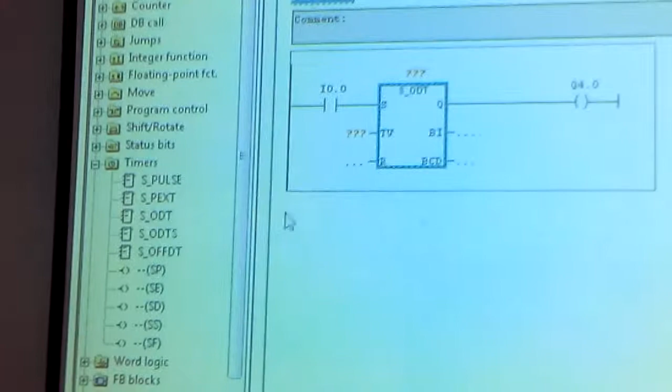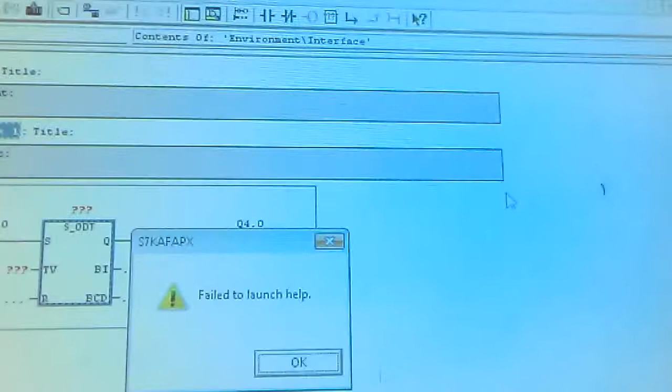Just see here. Select the network and double click here. This is the timer ODT, but I wanted to say this is the on delay timer. So just select it first and press F1. This is not appearing because in Windows 7 it doesn't appear. If this were Windows XP, the help page would have appeared here. That page is not able to open here because of that. But this is the on delay timer.

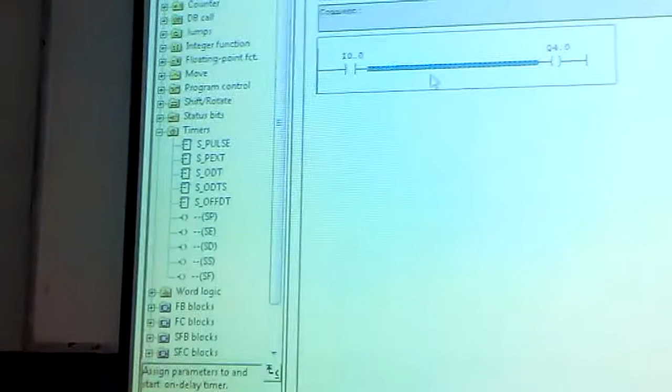So I am deleting it and want to show you the pulse timer. Why? Because we know the property of the on delay timer. That is why I am not using it. On, off, and retentive, we know the property. So pulse extended timer, what is the property of pulse? First of all, I want to fulfill the criteria of a timer. After that, we'll let you know.

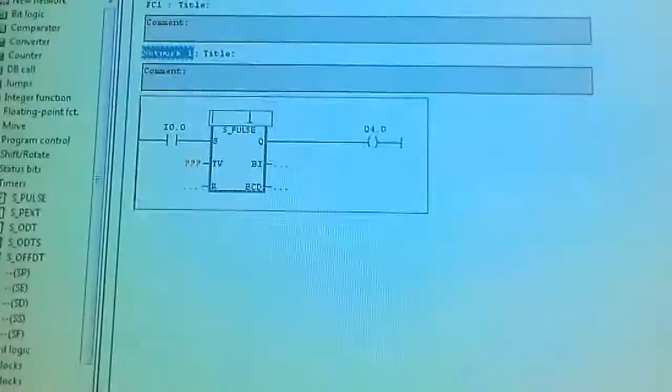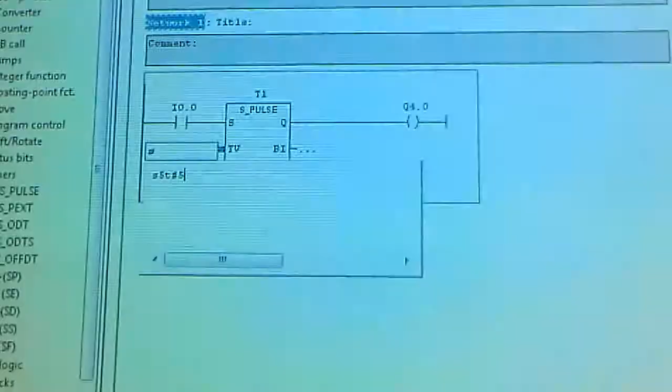Here is the T1. I am giving an address T1, and here is the TV. I am giving 5, whatever time you prefer, like 2, 3, 4 in seconds. So 5, and then I am writing S, 5 seconds, and again press enter. This value has been accepted. See, this is the code for the S7-300 timer. Using this, you can set the preset value of the timer. Otherwise, you cannot. Then here is the reset terminal.

At the reset terminal, I am giving an address like I 0.2, even I 0.1. See, it's not necessary to give an address on reset. It is up to you. If you want to give it, then give it, otherwise leave it. Why? Because the pulse timer has no need to reset. The moment you withdraw electricity, it goes off.

But so far as the retentive timer is concerned, it has the property that once it achieves its preset value, it becomes excited and behaves as a set. So unless that timer is reset, it will not work the way it was working earlier. So to work with a retentive timer, we need to reset. But on, off, pulse, pulse extended, it's not necessary to reset them. But the port has been given.

If you wanted to reset it during the achieving preset time, you can provide power supply on reset, and that will return to 0 for this purpose, right? And this is the BI, just equal to accumulator. So whatever time you have given to timer, the moment you start giving power supply to timer, it starts achieving preset value, and that value will be shown here.

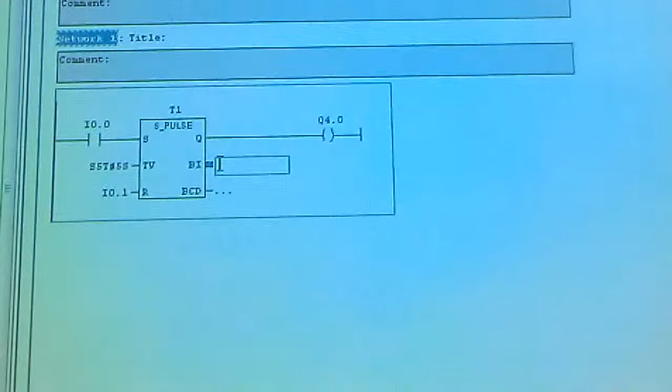What for? That means what value has been achieved by timer with respect to power supply. Fine. So that time will be projected here. So there is no use now. In future we can, but now no use, right? So I just wanted to show you in which fashion it provides delay. Clear? So again, here is the output. This has to glow with certain delay. Fine, this is the timer, has to provide delay.

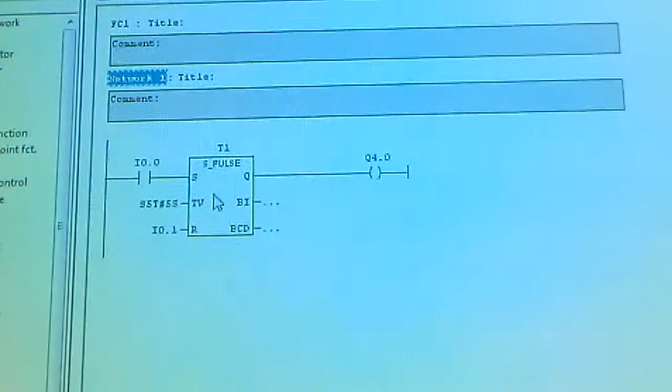But see, this is not an on delay timer which can provide delay after certain time. This is quite different, called pulse timer. So the property of pulse timer is to provide output as a pulse. And in pulse, what happens? The moment you provide power supply, it shows on the output.

Fine, but it appears on the output as long as you keep on giving. But the moment you interrupt, the moment you withdraw electricity, it goes off at the same instant. In the same fashion it works here, but it works with respect to time. That is why this has been named pulse timer, right?

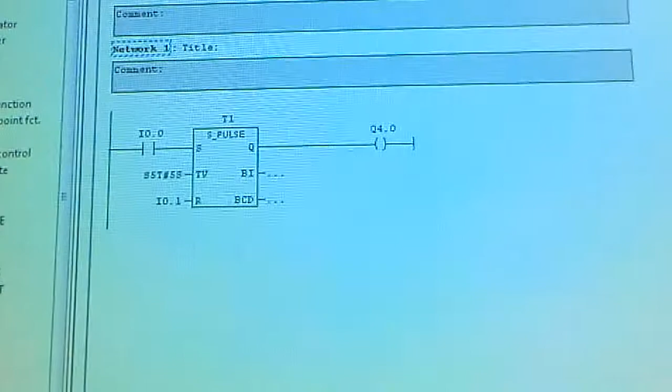So what I'm doing, I'll press, but before that I'm saving and downloading here. But this is not... so this program is not being downloaded because the respective page is not open where this program will be downloaded. That page is called simulation page. So we need to open the page and see. I have opened and just kept it minimized.

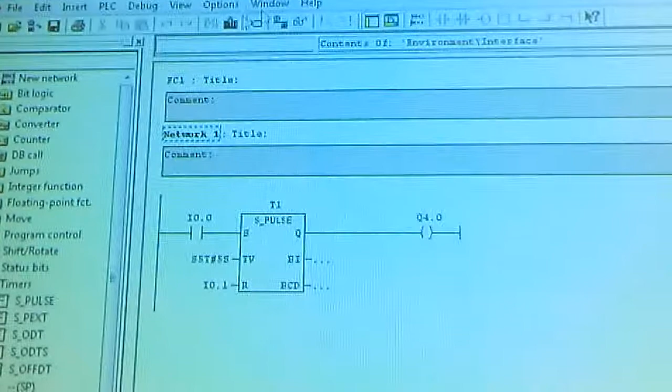Fine, and again go to main programming page and now save and click on download. Clear? And again just click on this monitor option. Fine, and go to simulation page, bring into run mode. Clear? And before that you can do one more thing. Yes, see, just go to run and here is the switch I0.0. Just press here. The moment you press,

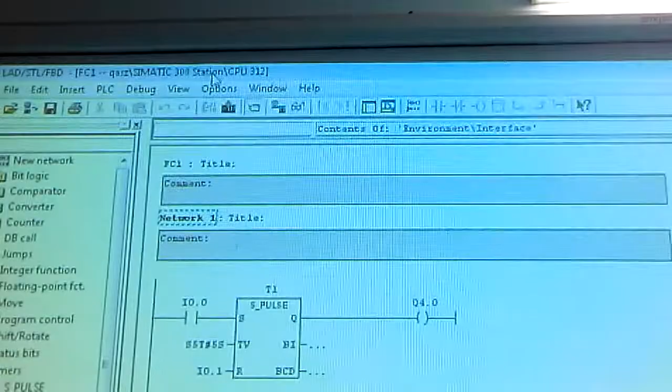but this is not on, just one more thing I have to do, right? Sorry, click here and stop. Fine. We need to download all the things from the beginning. So this is the program, and again this is the OB. Again this must be downloaded because I had closed the simulation window. So we need to download all the things like hardware window, OB and FC.

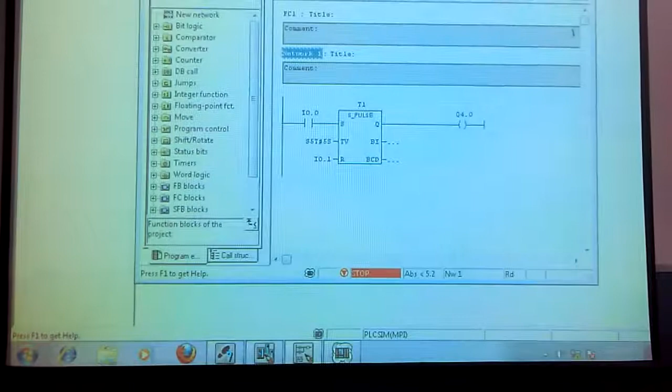Only then this will execute the task. Fine, again go to programming window, FC, and click on monitor. This is coming run mode, stop mode. Again I'm clicking here on run, right? This is running, and the moment you click on I0.0, see, output is glowing, but after achieving preset value this goes off, though power supply is being fed continuously to the input.

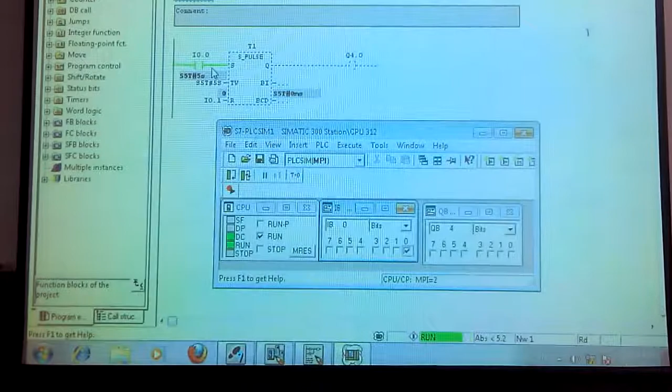Fine, so this is the property of pulse timer. The moment you start giving power supply to timer, it allows output at the same instant. But whatever value you have set for timer as a preset time, it provides output for that time. But the moment that time gets over, it stops giving output.

Input is continuous, fine, but it doesn't provide output till you interrupt once. Fine, and again you provide. See, as I provide, again I am getting output here.